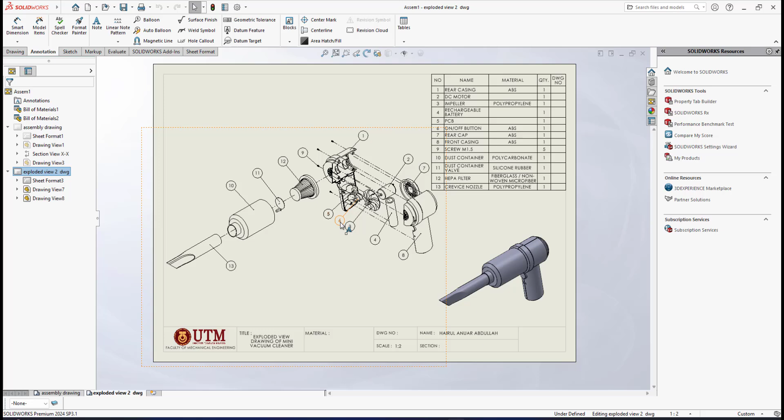In my previous video, I have already shown you how I have done this assembly drawing and also the exploded view drawing. Okay, I just need to tell you that this exploded view, I have changed the orientation of the view of this my mini vacuum cleaner. I already make a different view at this isometric view, and I have rearranged my balloons.

Right, so in this video I would like to show you how I will do the detailed drawing of all the parts involved in making this mini vacuum cleaner. Since you have to produce a set of working drawings, a set of working drawings of a product means you have a set of assembly drawing, where a set of assembly drawing you have assembly drawing plus the exploded view drawing, together with a set of detailed drawing of each part that is involved in making this product, except the standard parts like DC motor, the rechargeable battery, and the PCB, and also the screw M1.5, since those parts are standard components.

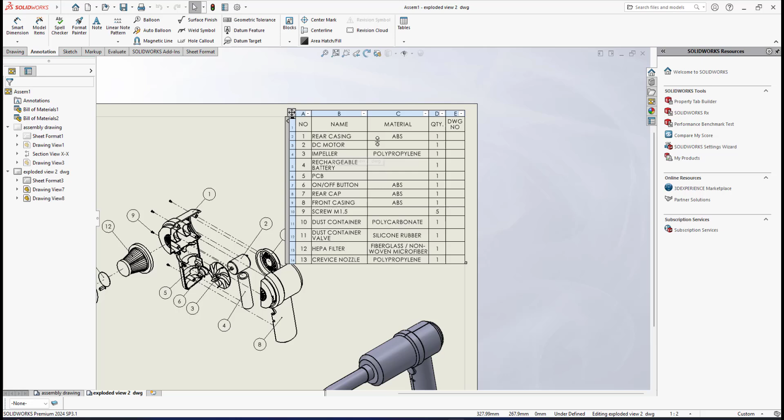Alright, in this video, I cannot show every part for detail drawing, so I will show you the main part first. The main part will be the rear casing and also the front casing. So in this video I would like to show you how I will do detail drawing of this rear casing and also front casing.

Okay, to do the detailed drawing of the rear casing, I will go back to the assembly file. So this is my assembly file. This is an exploded view, my assembly file. So I will click at the rear casing and I go open part. Alright, to do the detailed drawing of this rear casing, I will not make a new drawing from here, since I have already the drawing file from my set of assembly drawing and also exploded view drawing that I've shown you before. So I just leave this part file of this rear casing open. Then I go back to the drawing that I've done for this assembly and exploded view.

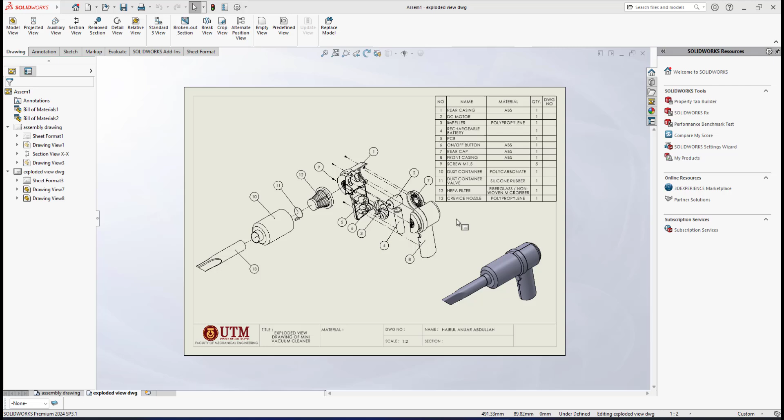Okay, to do the detailed drawing of this rear casing, here at the bottom I will not click at add sheet. This is okay, but I think I have to retype my name and my particulars here, so I will delete it. One way to do it is that I will make a clone version of this assembly drawing sheet here, so I can make a copy and I will paste it. Okay, I just select the sheet and I just click yes, and here the assembly drawing, I will drag it. So the assembly drawing is a clone version, so I can simply delete all the viewports and also the BOM as well.

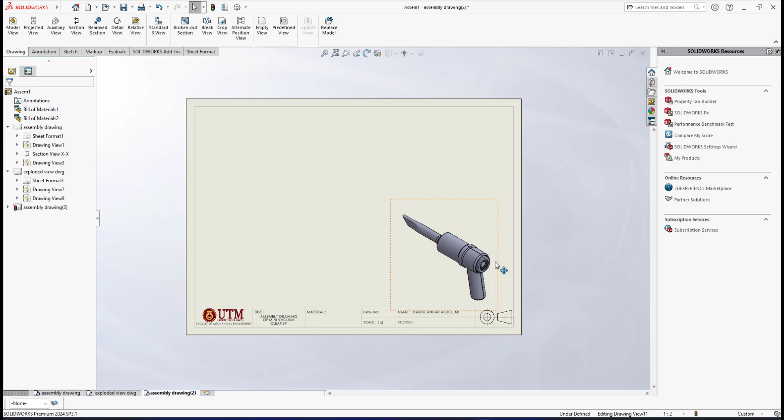Okay, since this is the detailed drawing of the rear casing, I rename it as rear casing. Okay, also the title block, I will edit it, and this one I will name it as rear casing. For the material, if you look at the assembly drawing, the rear casing material is ABS. Right, to put the text here, under annotation we have text, and I put it here.

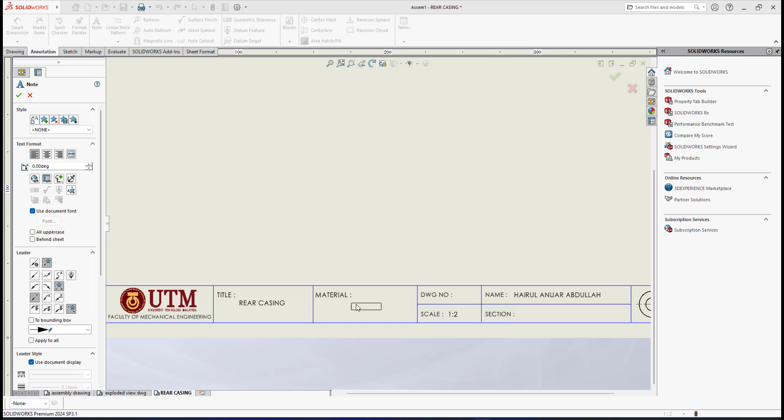Make sure it's in capital letters, ABS. And about the drawing number, if you look at the BOM, the drawing number here, I will type 1 for the assembly drawing in the BOM. So rear casing will be drawing number 1, and here for the rear casing I will double click at this drawing 1. And about the scale, later I will adjust it, either I will use half scale or full scale. Make sure all your particulars are there, and also this rear casing is an orthographic drawing. It could be sectioning, but we must have the third angle projection symbol.

Okay, now I go back to the drawing mode. I save my file again. Okay, now I will show you how I will do the detail drawing of the rear casing. At the right here we have the menu view palette. I click at view palette. Now I have all the views. So the rear casing is listed here since I have already opened the rear casing file.

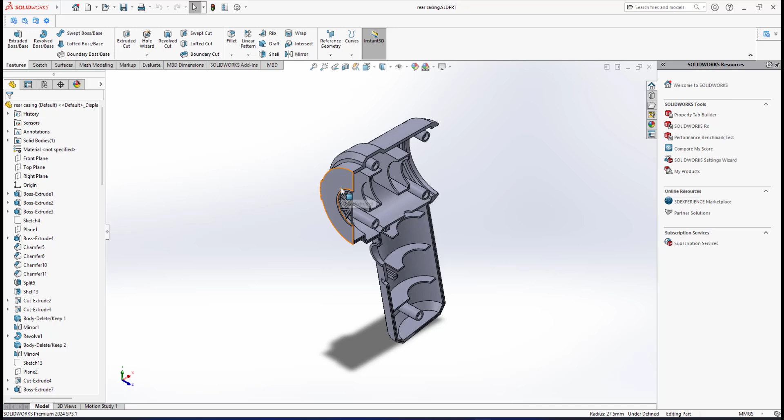If my rear casing file is not open, I close it, and when I go to view palette, if your rear casing is not showing here, you have to click at browse and you search for your rear casing file. So this is my rear casing. That's one way to do it. And now SolidWorks will put in the menu here all the possible views from the rear casing part modeling file that we can drag into this drawing.

Okay, before I proceed putting all the possible views for me to create the detailed drawing of this rear casing, let me show you the first thing about this rear casing of this mini vacuum cleaner. As you can see, this is a part modeling that I've done for the rear casing, and this rear casing is a plastic part made from ABS.

As you can see, it has kind of complex internal and external features. On the internal side we have internal features like ribs, mounting bosses for the fasteners, and also a supporting rib to hold the DC motor, the rib to hold the battery, and also the slot to hold the PCB.

So I think to do the detailed drawing with detailed dimensions, it would be too complex to be shown. It's not necessary to show really detailed and complete dimensions for this kind of plastic part. So I will only include the important dimensions, such as the overall size and the features which are important for assembly and fit in the engineering drawing.

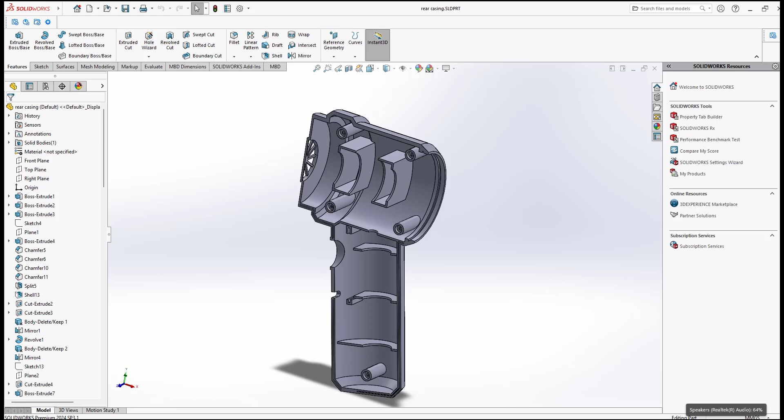So the main goal of this detailed drawing of this rear casing is just to show the design intent and assembly. We don't have to produce really detailed dimensions. Okay, to do the detailed drawing of this rear casing, the first thing I need to decide is which view I should drag to this drawing. For my case, the most important view that I should put into this drawing will be the front view.

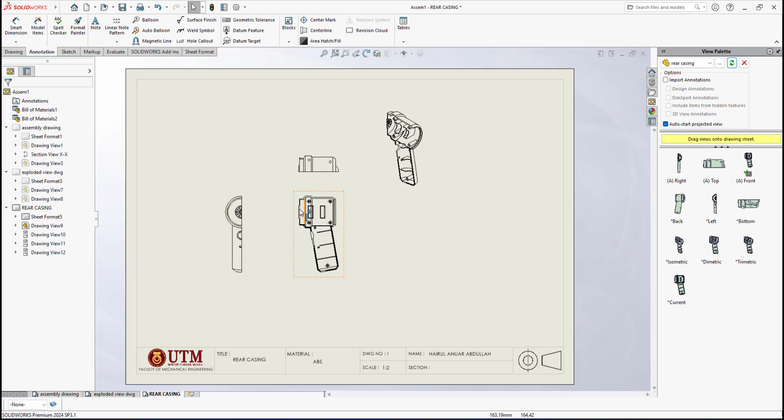So I will select this front view and drag it to this position. If I bring my mouse here, I can go for plan view, and here I can go for left view. If I bring it here, it will go for isometric view. So I press escape, and as you can see, this main view is the front view. If I click at it, I go for 1:1 full scale, and let me drag this. I think full scale is good enough to fit into this A3 size paper.

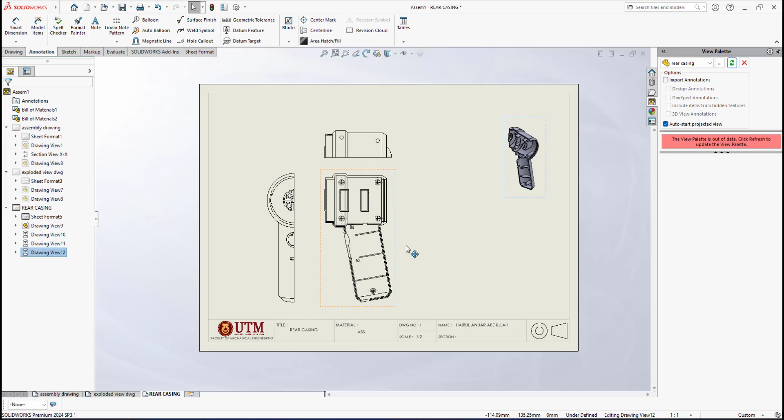And the isometric view, I put it here and make it shaded style, and also right click at it and remove the tangent edges. And for this isometric view, in the settings on the left, make it half scale. Since I already put three views here, later I will decide which view I can delete, either the left view or the plan view, but I need this front view, since it is the main view that shows all the features of this rear casing.

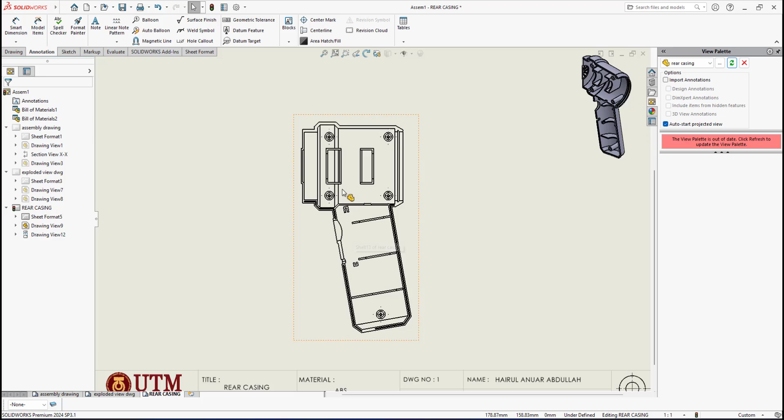Okay, let me delete for a while this left view and also the plan view, since I already mentioned that we don't have to do complete detailed dimensions for this rear casing, and I will show only basic dimensions like the overall size and dimensions for important features of this rear casing.

About this front view, later I will also show you how I do the removed section, not full section, that could show some features of this rear casing. For example, the ribs, the holes here, we have the hole for the power button, and also features of the slot, and also the 3, 4, 5 pins here, and the other important features.

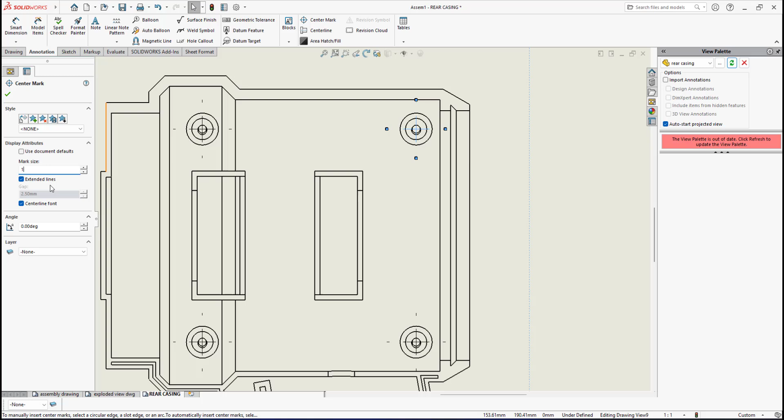Alright, the first thing is to look at these 4 pins here. We have a center mark. If I click at that center mark, it uses the document default, so I uncheck it and make sure I put it at 1. Now we have a better version of the center mark, so here as well. So I will select this center mark, and I select this one also.

Then I uncheck it and make the size 1. Right, let me save my file first. Okay, since this front view is not a section view, it will be a typical orthographic view, so I will make sure it shows hidden lines. And another thing, I've got to make sure that the tangent edge is removed. Okay.

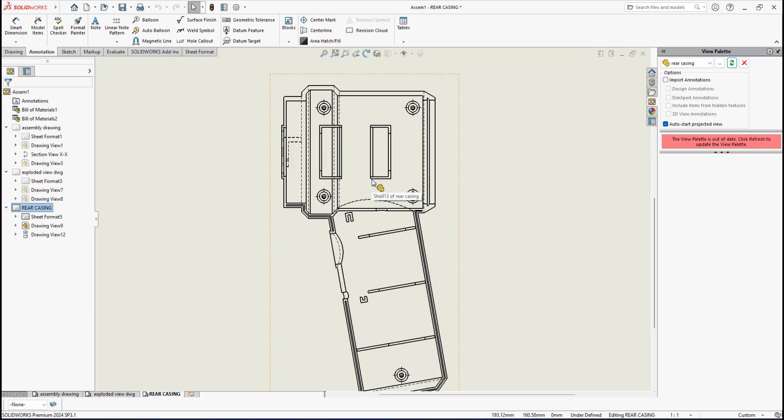Because this is the handle, I need to show a center line, since the handle is kind of like an elliptical shape. It's not a round shape, but I need to show the axis. So I have the center line under annotation, so I will select these 2 lines holding my control key, then I have the center line, so it kind of shows the axis of this handle, right? Then put it like this.

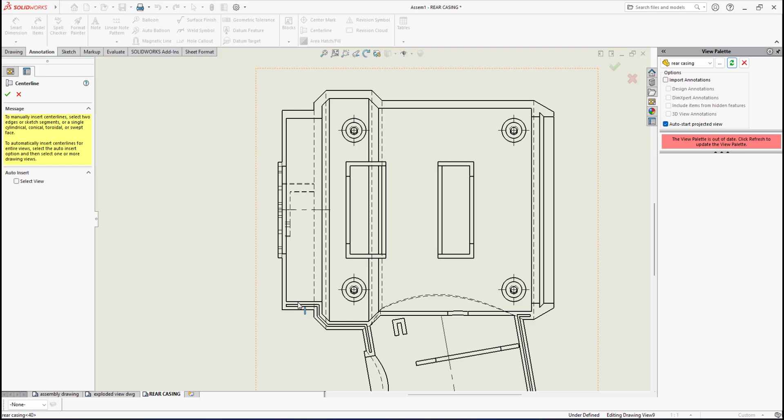And same goes for the upper part here, since it is like a cylindrical shape, I will also do a center line, so I select this one, and hold on, not this one, let me clear everything. I do center line, I select this line and this line, so I have the center line, so I can drag the center line like this, so we have the axis.

Okay, before I do dimensions for this rear casing, I need to mention to you again, this is the rear casing. It is a plastic component made from ABS. The way they will manufacture this rear casing is not by reading your drawings. Since this is a plastic casing, they manufacture it by sending your SolidWorks part modeling file to CAM software like Mastercam.

And this software will translate your SolidWorks part modeling file into a CAM version, and in this software you will do kind of coding, translating it so that this file can be read by a CNC machine. This file will be sent to the CNC machine, computer numerical control machine, and this CNC machine will do the right tooling and make the metal mold for this rear casing.

After the metal mold is done by the CNC machine, it will be put into the injection molding machine. This injection molding machine has a feeder, so the operator will pour the plastic bits, which is ABS material, into a screw feeder, and the screw feeder will compress these plastic bits into liquid ABS plastic, and this liquid ABS plastic will be injected into the metal mold. So they make a mass production of this rear casing.

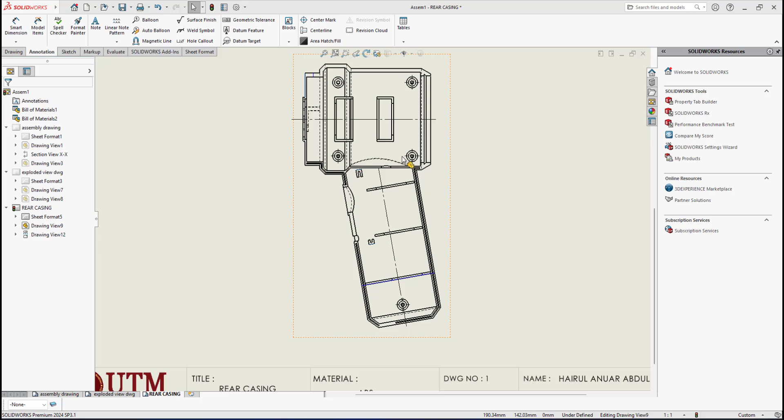So since this is how they will manufacture this rear casing, we don't have to put really detailed dimensions for it. The dimensions are meant for the assembly line, because at the end of the production line the assembly guy will assemble your parts, so we need to provide dimensions as a guide for the assembly guy, so he knows the dimensions in terms of assembly and fitting.

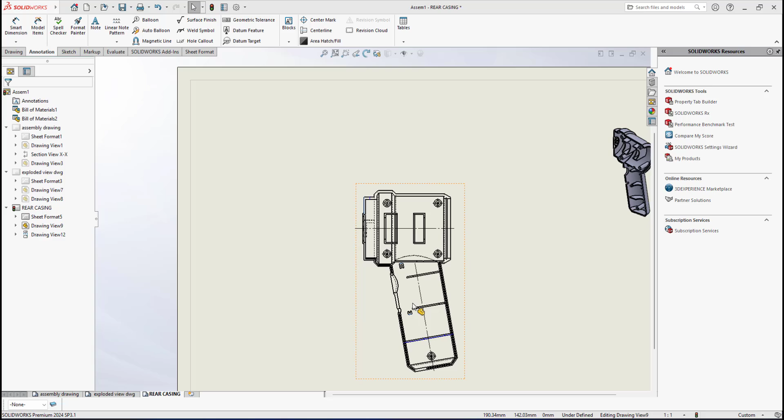For example, we need to give the dimension of the end nozzle of this rear casing. We need to give the diameter, since we need to fit the dust container into this position. The dust container has an inner diameter, so we refer to the outer diameter here on this rear casing. It's for assembly and fitting of parts, so you don't have to give detailed dimensions for this rear casing unless your drawing is meant for the machinist on the manufacturing floor, like most metal parts. Then your drawing has to be really detailed with complete dimensions.

Alright, so the dimensions here will be rough dimensions. It can be the overall size of this rear casing, and also dimensions of features for assembly and fitting, like the diameter of this nozzle to be fitted into the dust container. Then also the position of this pin, because we have bigger pins for this rear casing. We have 5 pins, so we need to give the size of this bigger pin.

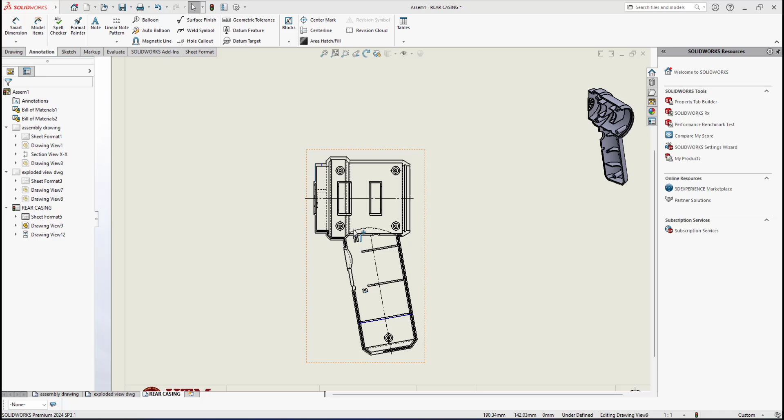Since this pin will be fitted onto the front casing, where we have a smaller pin that will be fitted onto this bigger pin here, we need to give the dimension of this pin and the location. And also inside here we have an inner thread, because of the fitting of the fastener, the screw M1.5. We need to give the dimension for this inner thread, for example M1.5.

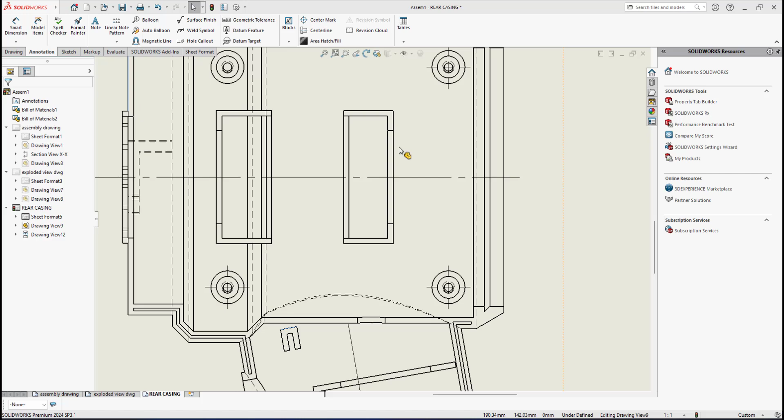And also features like, for example, I don't have to give the thickness of this rib, because that is not significant, like I mentioned just now. The only thing is about fitting, since for this supporting rib the DC motor with impeller needs to be fitted at this location. We need to give dimensions in terms of fitting the DC motor. For example, the DC motor is a cylindrical shape with a certain diameter, so we need to give the diameter of this cutout, only for assembly and fitting.

Also, the battery will be put into this location. Since the battery is cylindrical, we need to give the diameter of this cutout where we will mount the rechargeable battery. Also we have a hole here for the power button to be fitted. We need to give the diameter of this hole.

And here we also have a slot for the PCB with the USB port; we need to give the dimension of this slot, and only the important features. We don't have to make really complete detailed dimensions. So I will show you how I will do dimensions for this rear casing.

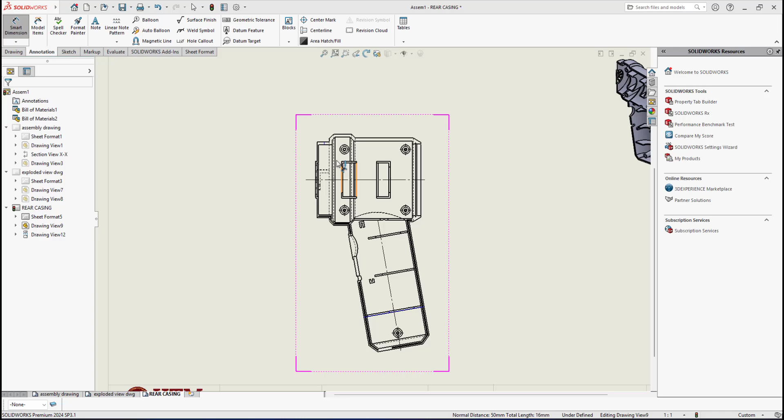Okay, to do dimensions for this rear casing, the first thing is the important features for assembly and fitting. So this diameter at the end nozzle here will be fitted into the inner diameter of the dust container. To do a dimension, under Annotation we have Smart Dimension, so I click Smart Dimension, then I go for this line and this line. As you can see, when you do a dimension there is an icon for whether you want to go to the left or to the right. So I will go to the left, so it will be put at this location.

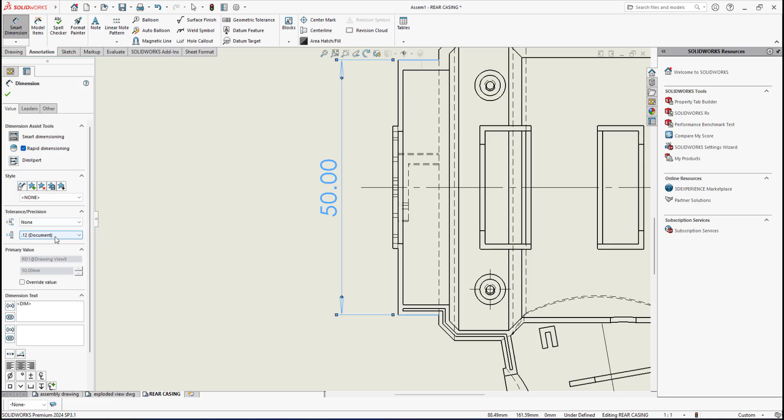And as you can see, the text is 50.00, so in the settings on the left, under tolerance precision I can go for none, no decimal point. If I click OK, the dimension text is okay, the dimension line is okay, but the arrowhead is not filled in, not solid. So this is not standard.

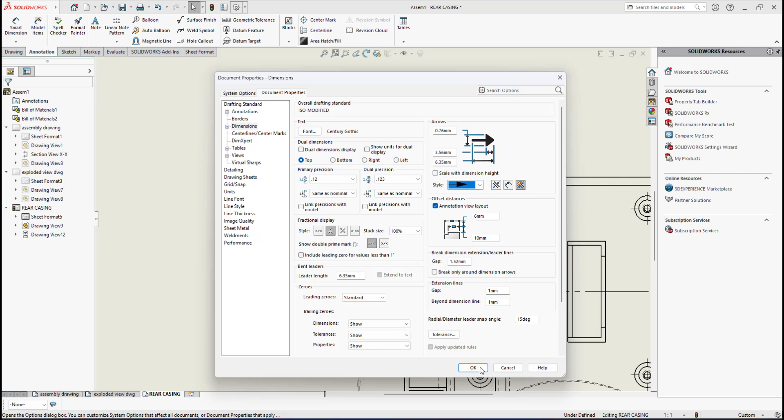In order to fix that, you click Options, and in the menu, I'm not going for the System Options tab, but under Document Properties we have Dimensions. If you look at the style of the arrowhead, I will not go for this one, I will go for the second one. It makes a solid arrowhead. Then I click OK. Now you can see the arrowhead is solid.

Alright, I already put dimension 50, but you must obey standard dimensioning. It's not too far away and not too near, at least for the first label about 2 letter heights, about this position. If sometimes your text is not aligned at the center, in the settings on the left under Dimension Text we have this icon. If I click it, it centers the dimension text. You put your text in the middle.

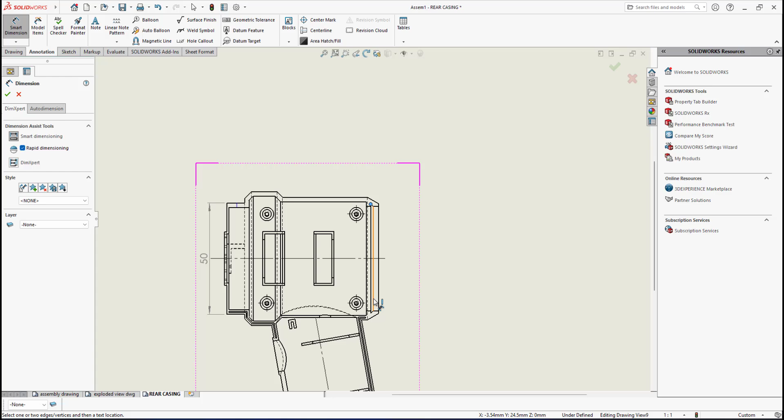Another important dimension, like I mentioned, we have a slot here since we need to fit the rear cap, so we can show the diameter of that slot. Since the rear cap is based on this diameter, I click this one and this one, then I put it at this location. So the diameter is 49, since the rear cap diameter is also 49 and will be fitted here. For the decimal point, under tolerance precision you can go for none, so there is no decimal point, and you need to position it a little bit closer.

Another important dimension, before I go dimensioning the 5 pins here, is the overall size, because the upper part is more like a half cylindrical shape, so I need to give the overall length here. So I click this one, go to the top position, go for no decimal point, and not too far above, about this location. Let me save my file. So I have a basic dimension for the overall length of the cylindrical unit. And another overall dimension is the total length of this handle.

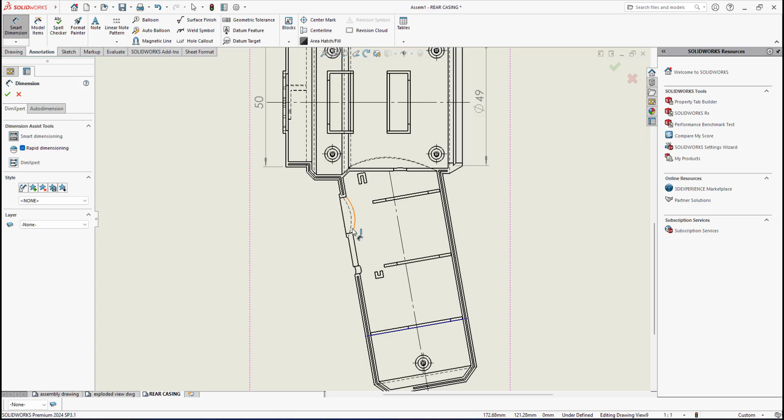At least I can show it. Okay, to do the length of this handle, I can do dimension from this point up until that point. I will go for this line, so it can make a line dimension like this. So I click like that, so 85.27 will be the

length of this handle. But if you look at the setting on the left here, we have centre dimension, so you put your dimension tag in the middle. Right, I have the total length. Okay, another thing is about the width of this handle.

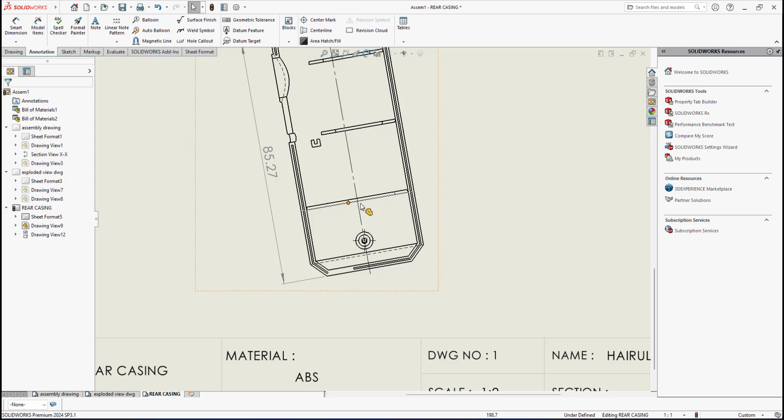Alright, the width of the handle. We have a projection view at the bottom here. One way to give the width of this handle, since the shape is not round, it's more elliptical shape, I can do what we call in drawing a removed section. To do a removed section, I can select this line and also this line. So I have a position where I want to do the removed section.

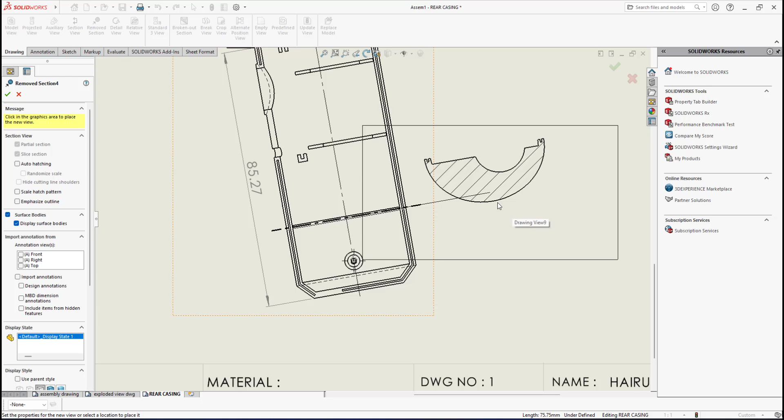I will not do it at this section, I will go straight away to the supporting rib that can hold the batteries. So I make sure it snaps at that middle point, then I simply click OK. Then I bring my mouse to this location. So this is a removed section. By this section view here, I can give the overall cross section of this handle. So under annotation, I can give dimension from this point to this point.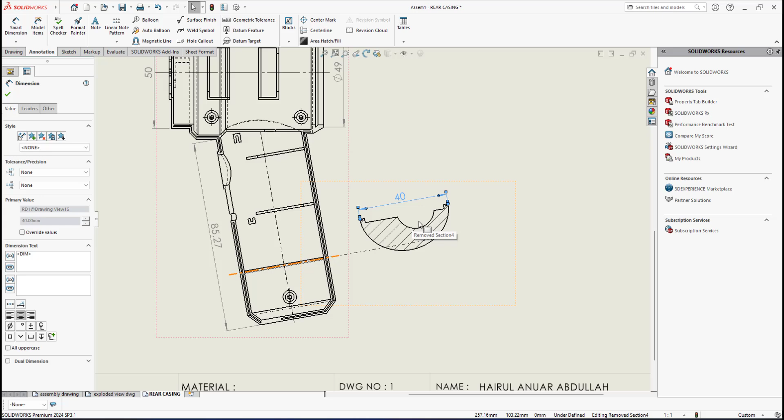Hold on, I must click a dimension first. Dimension from this point to this point. Make sure it's aligned dimension like this, and in the setting on the left, I make it no decimal point, and I click OK first, then I drag it somewhere at this position. So this will be the width of the handle. Since this is an elliptical shape, it's not a full circle.

Okay, if I do the dimension from this point, I don't have a reference point here to give the height of this elliptical shape. So in order to do that, under the sketch here, I can do a point. So I put a point somewhere. It will snap at the middle of this ellipse. So I have a middle point there.

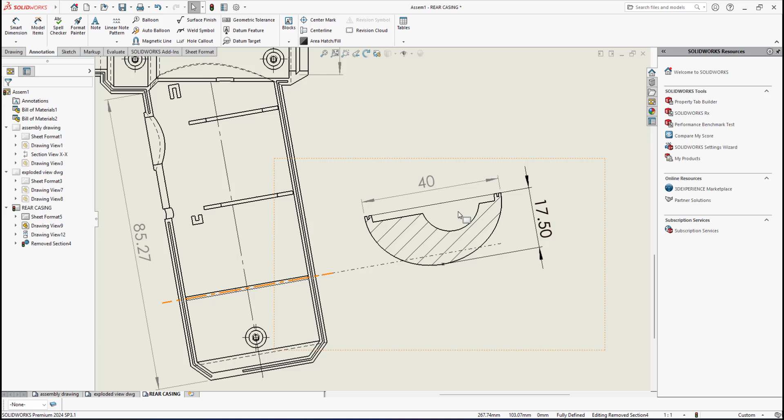So under annotation, I can do smart dimension again. I can start from this line up until this point. I just click OK. Now we have a height of 17.5. So this will be the overall size of the cross-sectional shape of this handle, right? Okay, let me save my file again.

Okay, the next one: since we have features, we need to show what the diameter will be, since we need to mount the rechargeable batteries, and rechargeable batteries have a diameter. So I need to give this dimension here to show radius or diameter. So this is meant for the assembly and fitting.

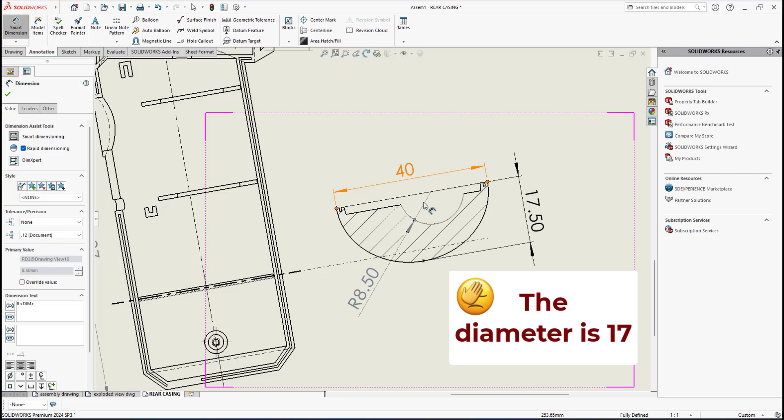It means that the radius is 8.5. It means the diameter is 17, since the diameter of the rechargeable battery is 17. Okay, I have that feature. And another thing is, we have 3 more supporting ribs. I don't have to put detailed dimensions. The dimensions I want to show are only meant for assembly and fitting. So once I already put it here, it's enough to show.

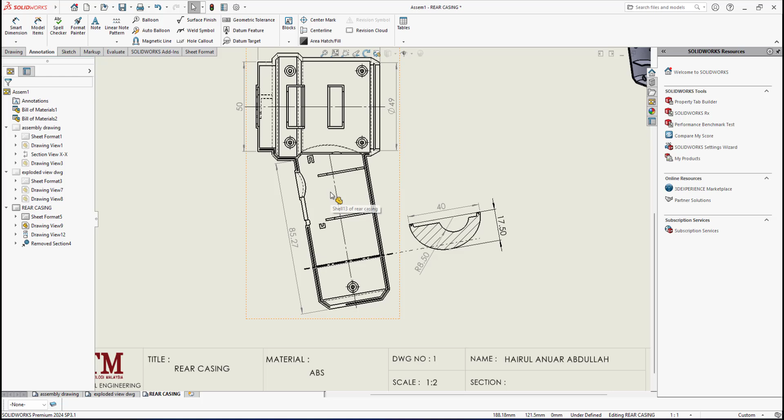So we have a supporting rib here, and the diameter is 16, and it's meant for putting the rechargeable battery at this supporting rib. Right, like I mentioned, maybe I can go for the overall diameter. Since here is meant for the cutting slot, we have a cutout for the rack cap, but at least I can give the diameter for this cylindrical unit from here to this one.

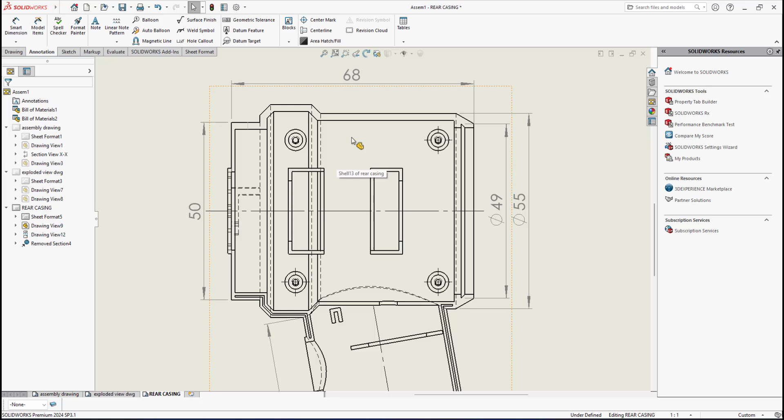So I go to the right, so it gives diameter 55. This one I make no decimal point. Okay, so I have that diameter. I already gave the overall length. And okay, another thing is about these 4 pins. I need to give the location of these 4 pins.

Okay, another thing about this pin, I forgot to put the center mark. So under annotation, we have center mark. I will select this circle. So I have that center mark.

This one I don't want to use document default size. I will go for 1, so I have a kind of standard size for the center mark. Now I will give dimension, the position from this center mark to this center mark. So I just click at the upper icon.

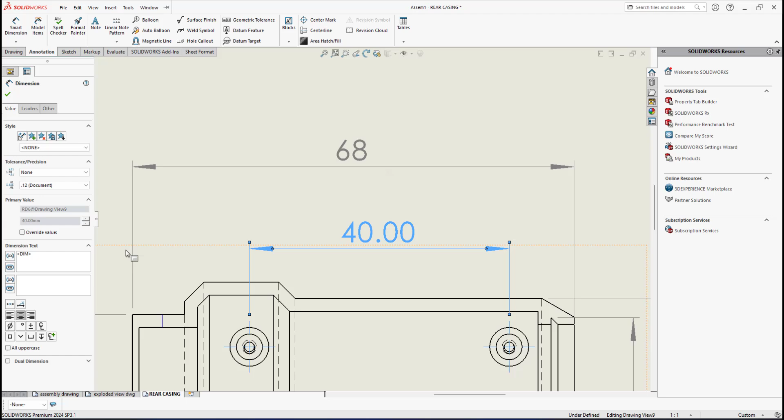As you can see, automatically the diameter 68 will be shifted upward. I need to drag it, so this 40 needs to be a little bit closer like this, and no decimal point, and the diameter 68 needs to be a little bit like this. Alright, so I have the dimension, the distance between these 2 pins, and also the vertical dimension, the distance between these center marks and these center marks.

So I just bring the icon to the right, so everything is shifted, and no decimal point, but I need to readjust, so the dimension is not too far away to the right of this location. I need to adjust this, make it a little bit closer. Okay, then I click OK. Then I save my file again.

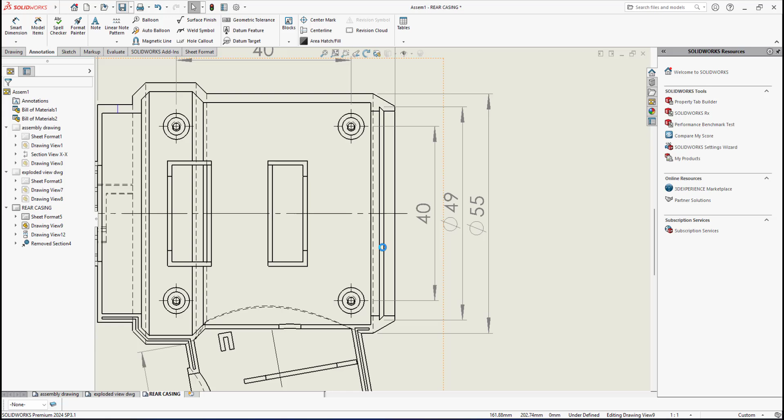Right, I already gave the horizontal dimension and vertical dimension of the pins. So where is the position from this center point of this pin to the end here? I need to give the location from here to here. The dimension is 18. You have to make it align like this, and no decimal point. So now I have 18.

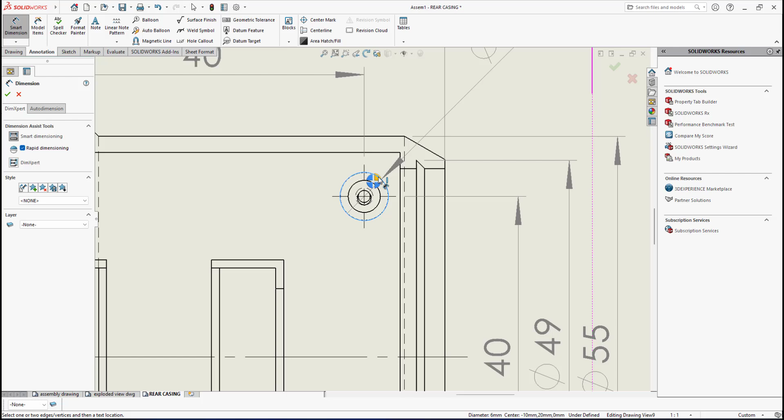Okay, since I already put the location of the 4 pins here, I need to give the diameter of that pin. So I can give here the diameter. Sometimes it's allowed to put your dimension inside, but in terms of clarity, maybe I can put it like this. 6, so you have diameter 6, no decimal point. So this will be the size of the pin.

And also I need to give the inner diameter, since the pin of the front casing will be fitted into this inner diameter. So at least I must show the inner diameter. It's okay to put it inside the object, but not too much, for clarity of the drawing. So I have diameter 4 like that. Maybe I can drag it to this position.

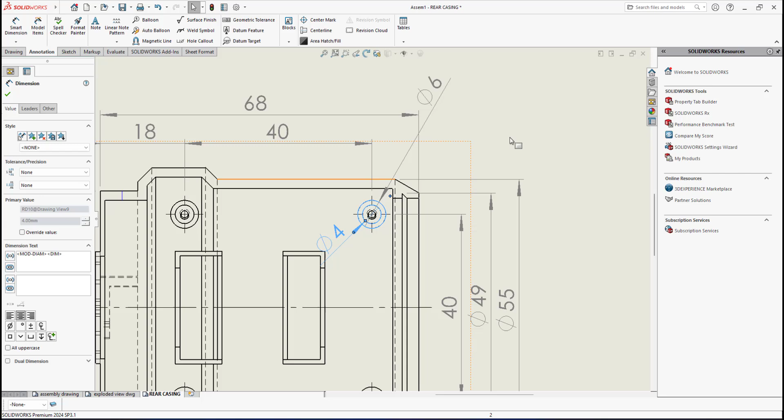Alright, the next thing is the supporting ribs to hold the motor. I don't have to put detailed dimensions, but at least I can show the cutout of the supporting rib. We have a half circle there where we will mount the DC motor. Since this view is not showing the shape, as you can see here, the cutout is part of a circle. So I can do a removed section.

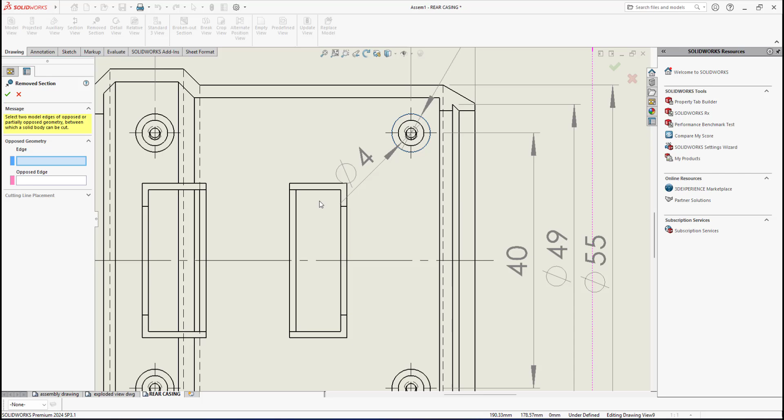Under Drawing we have Removed Section. I do removed section, I can select this line and this line. So we have the level where we will put the removed section. I go for the middle point, then I simply click OK. Then I bring my removed section to this position, and now I have a cross-sectional view of the supporting rib.

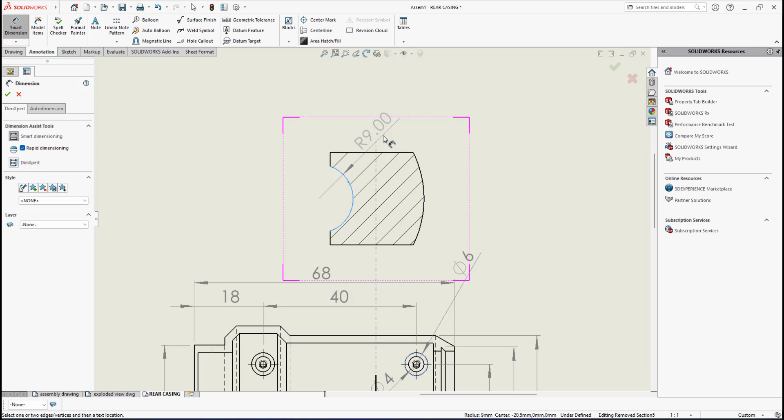Right, I don't have to give detail of the length or the width. The only thing I need is this diameter, for assembly and fitting, because we need to mount the motor at the supporting rib. Since the motor diameter is 18, we have a radius 9. I can go like this to put the dimension radius 9 for this circular cutout. Under value, I go for no decimal point, and put it at this location.

Alright, so this is a removed section. For the other side, I don't have to do the removed section again. The only thing I need to show is the length from here to here. To do that I use smart dimension, then I select this line, from this line to this location.

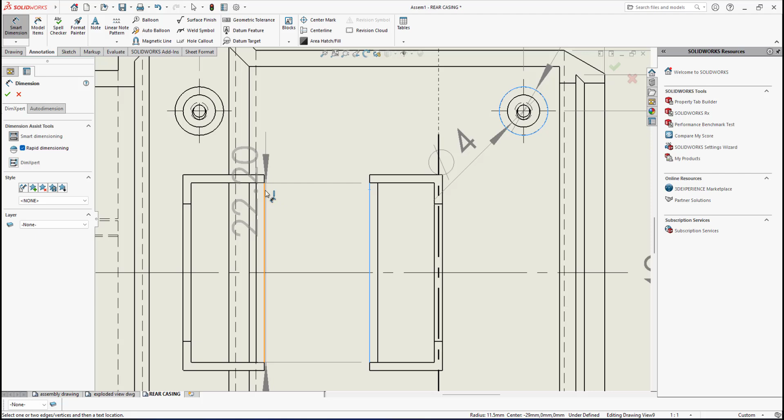Sometimes it's allowed for you to put dimension inside, in terms of clarity of the drawing, but not too much. So I put no decimal point for this, so at least we know the distance from this supporting rib to this location.

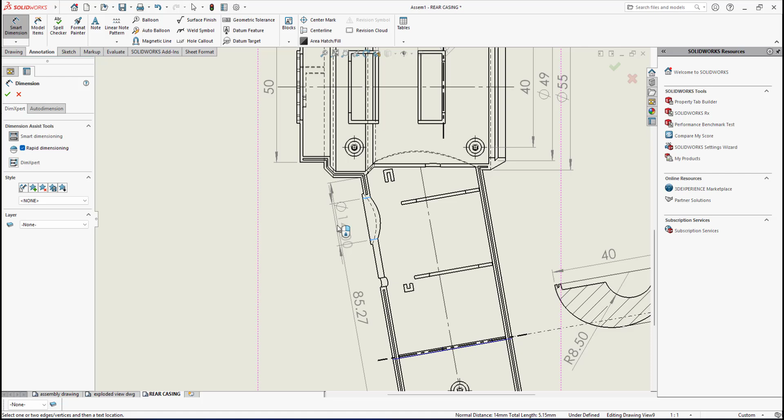Okay, here we have a cut-through hole where we will mount the power button. I can do dimension from here to here. So I will put dimension 14 at this location, and no decimal point. And this total length, I can shift it to this location.

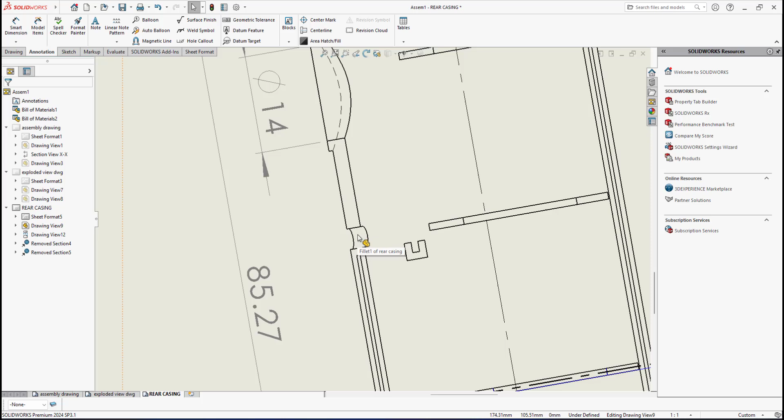Okay, now I have given the dimension of this hole. Another thing is, we have a slot here where a PCB will be mounted into the slot, and the PCB has a USB port, and I need to give a dimension for this slot here. To dimension this slot, I will do the auxiliary view of this slot.

To do this view, under Drawing we have Section. What I will do here is a section view. I'm not doing vertical or this one. I will go for this one, auxiliary section line. So I will select from this middle point to this middle point. Then I click OK. Then I simply click OK.

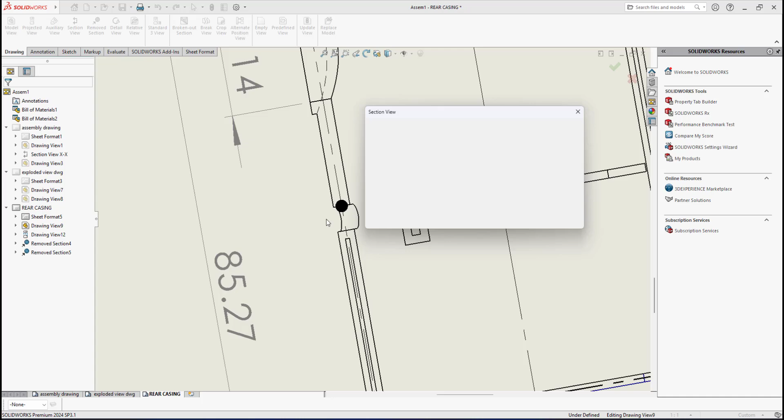It's kind of like we're looking from this view, we have this cross-sectional view, but the cutting section is kind of like a full section. Let me click OK first. If I select this cutting line, I click edit cutting line, then edit sketch, and then I select the line. I'm not adding more lines, I just press escape and select the line here.

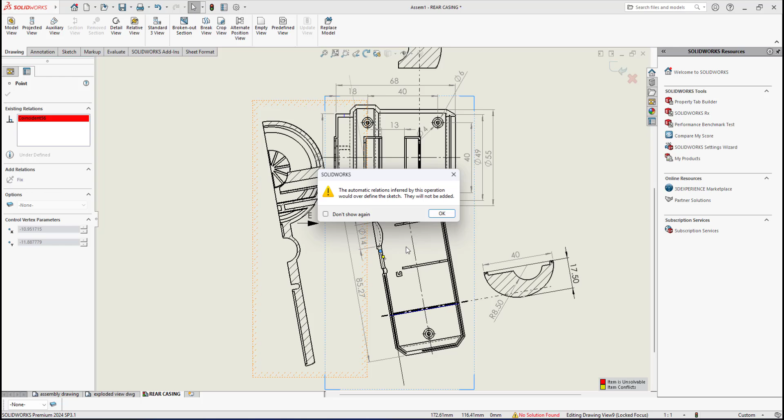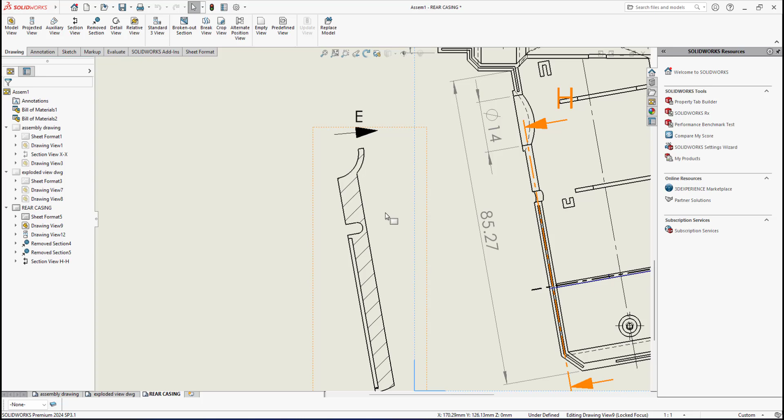I make it shorter up until this position, and click OK. And this section here, I make it up until here, and this one I make longer up until this position. If I click OK and exit, we have a kind of removed section. This arrow shows looking from this direction, so I can see the normal, perpendicular view to dimension this slot for the USB port to be fitted into.

So I can do smart dimension from this point to this one. This will be 4.5. I can also give a dimension from this point to this point. I make a linear dimension like this, and this one is 3, with no decimal point. Then I click OK. Now I have the dimension.

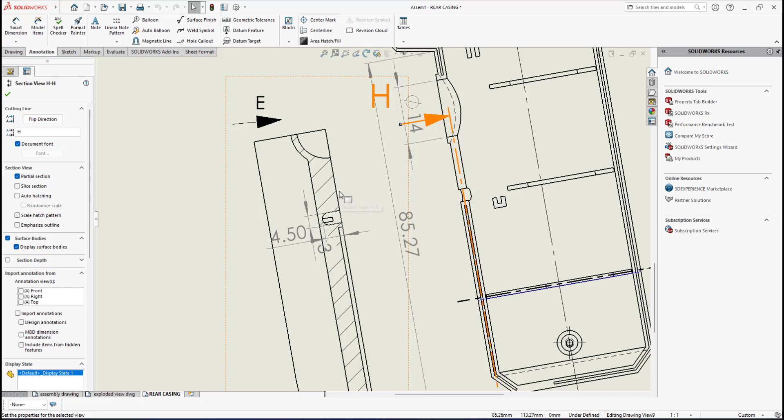Another thing I found here: since the viewing direction is this way, I need to click flip direction on this cutting line, so it goes to this viewing direction. Now my section view goes to this orientation, so I need to adjust. I already put the dimension of the length here. So this will be the width and length of the slot, meant for the PCB with the USB port fitted into the slot.

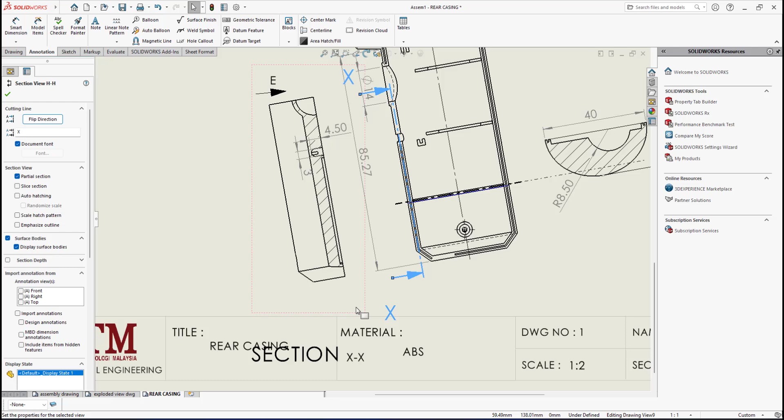Okay, the label here I can change. Instead of H, I can go for capital letter X. I click OK, and now I have this section view. And since we have section X, a kind of removed section, I can bring the title here. I don't want it to overlap with the title block.

And this title, I need to change it. Make sure it's in capital letters, and make sure the text height is 4. Okay, now I've done this, showing the size for this slot.

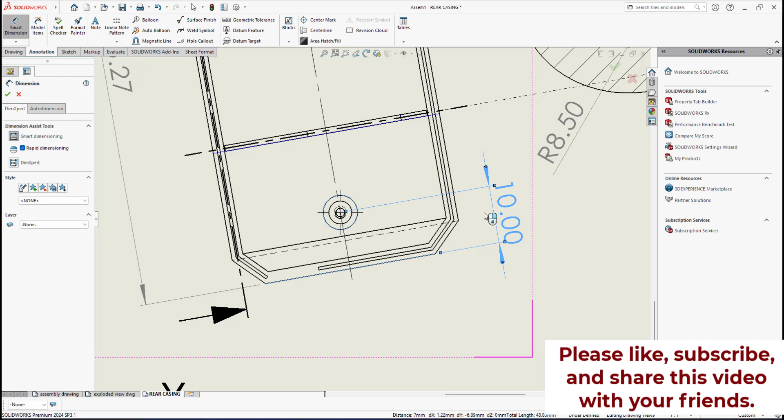The next one will be the location of this pin. I will do smart dimension, and I will not select the center mark. Just simply select the circle and this edge, and the dimension is 10.

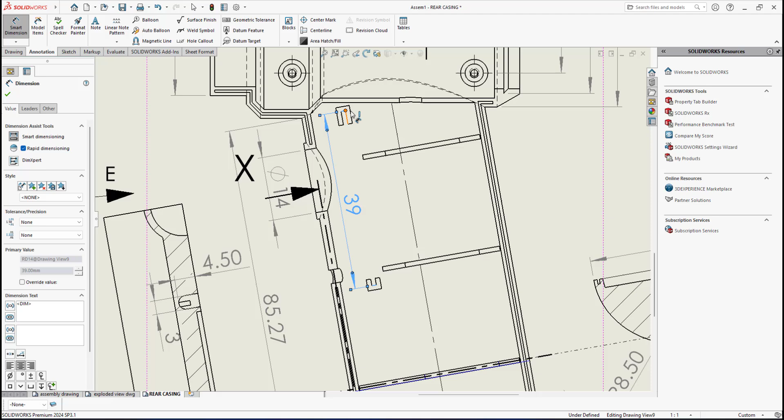The last thing to show is this one. Since we will mount the PCB into the slot, we must show the length of the slot, not the outer length but the inner edge from here to here, since this length will be the length of the PCB. I don't have enough space here; as I mentioned before, it's allowed to put dimensions inside the object, but not too much, for clarity of the drawing. Now I have length 39, which is the length of the PCB.

Another thing about the PCB is thickness. I must give the thickness from here to here, so I must give this dimension as well, since this will be the size of the PCB.

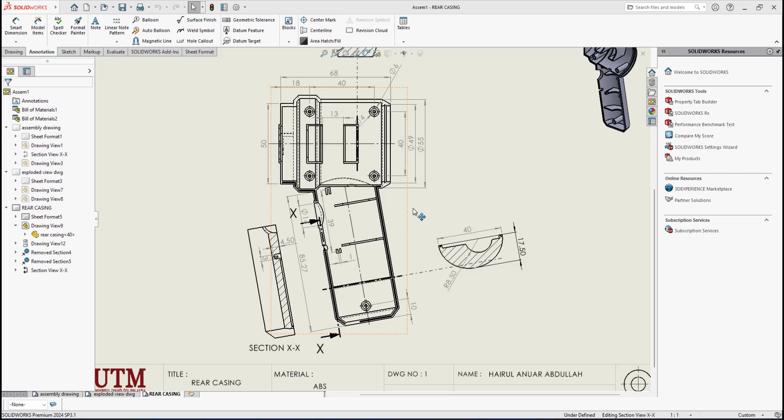Alright, let me check again. Okay, one thing about this X, so this is a letter X. I can adjust the letter X at this position. Okay, I need to position this front view here to make it to the center of this drawing. Okay, at least all these views are at the correct position.

Alright, the next thing is about the dimension of this internal thread. I need to show it, since this is an important feature to be shown, since we need to mount the M1.5 screws into this internal thread at the back there. So I need to put a dimension.

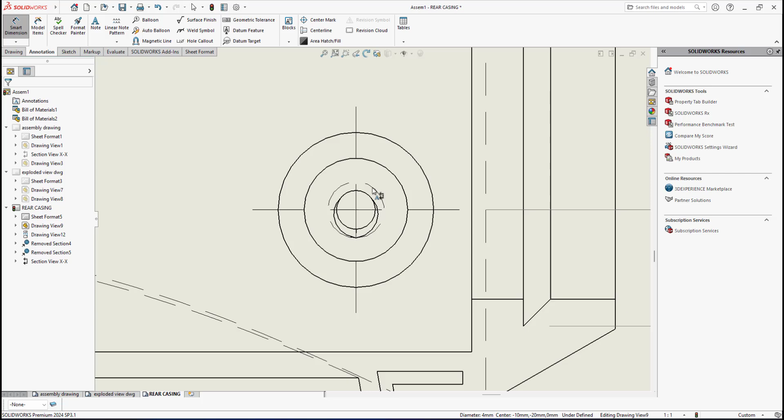If I go for annotation, smart dimension, I cannot point to the internal thread features; it cannot point to the circle or the curve. If I select this one, I cannot make a radial dimension. But if I select this curve, this is not the internal thread, this is the inner diameter of this pin, so I cannot do that.

Alright, in order to give an internal thread dimension, under annotation here, we have an option called hole callout. I click at hole callout, it will detect this circle here, so I can put the dimension here, but I will not go for radius 0.75. So under the dimension text, I go for metric thread. Make sure capital letter M. Make sure it is M1.5. 1.5 is the major diameter.

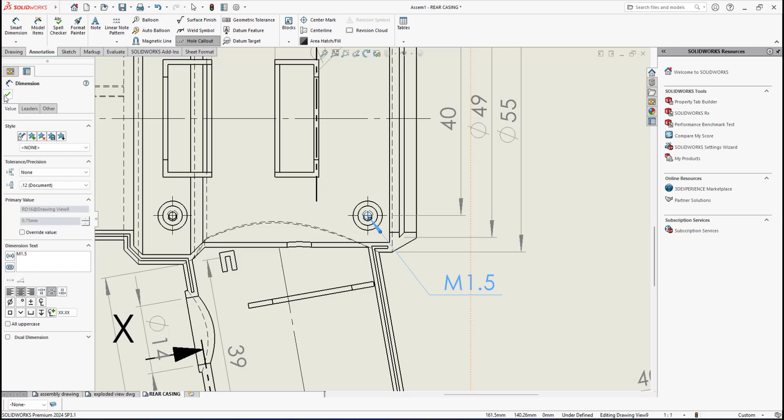Okay, so this can show that this thing is a metric thread. The major diameter is 1.5, so it means that the screw M1.5 will be fitted onto this internal thread. Alright. Okay, one more thing before I forget, about the dimension of this.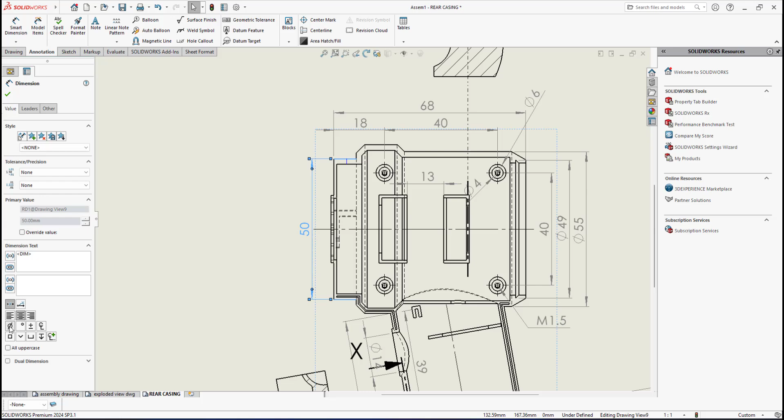At the end here, since the upper part of this rear casing is a cylindrical shape, I need to put a diameter symbol before this dimension text 50. So here at the dimension text, I will click at the diameter symbol, so it shows that this is a cylindrical shape.

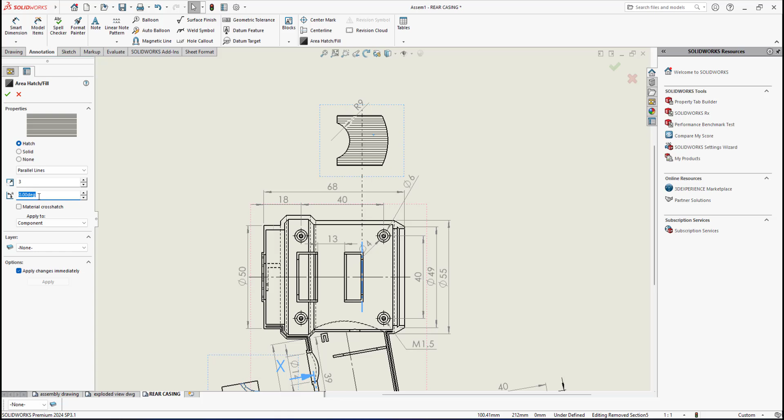Alright, another thing is about the section lines, the hatching. It's using the material cross hatch, so I will use parallel lines, and I will go for 3, and the angle is 45 degrees, and same goes here. So I need to select this one and also this one. I'm not using material cross hatch, so I will use parallel lines, density is 3 and 45 degrees. Okay, let me save my file again.

Okay, another thing: if you look at this title block, the scale is 1:1. I already changed the scale to 1:1 since when I drag this front view, the scale is 1:1, so be aware of this scale.

Okay, hold on, something is not updating here about this one. I have to click this. Sometimes it happens like this. This one is already supposed to be parallel lines.

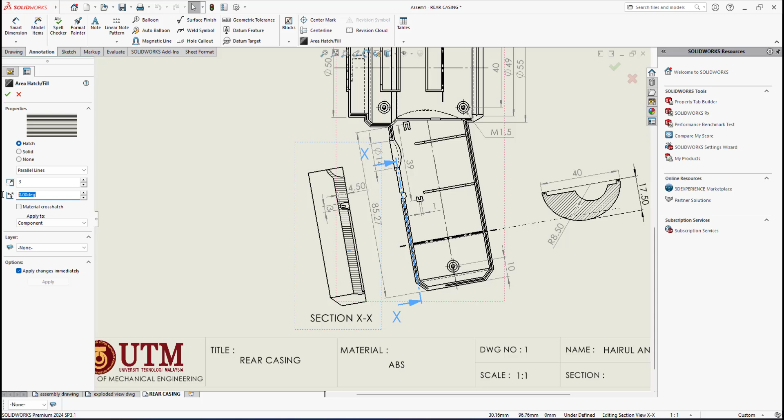Okay, one final thing that I forgot to put is this. At the back here of the cylindrical unit of this rear casing, we have an L key shape, where this L key will be fitted into the L slot of the dust container, since the dust container will be mounted at this position, and this L key will snap fit lock to the L slot of that dust container. So it's very important to show the features and the dimension of this L key.

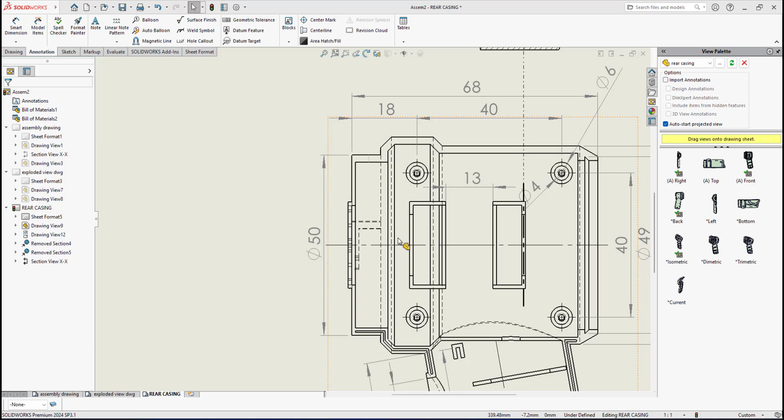Alright, to do this, I will go here, the view palette. At the view palette, here we have a back view. So I will drag this back view. As you can see, it kind of automatically aligns with the front casing. So I will go to this position, and let me click OK first. And now I have the back view.

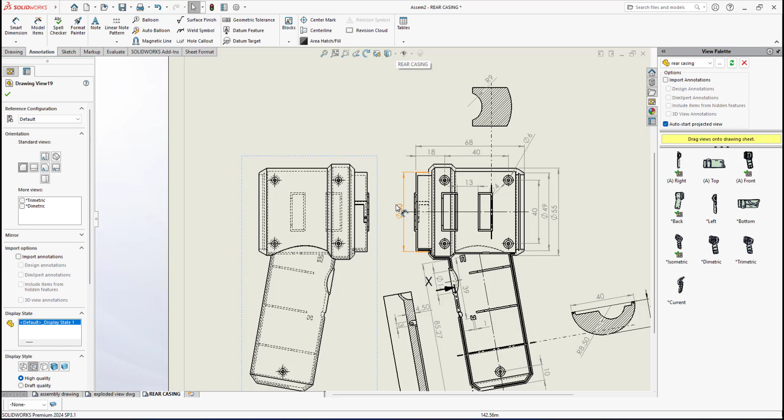Alright, about this back view, since this is not a section view, I select this viewport, make sure to remove the tangent edges, and also go for show hidden lines. Okay, since at the front casing I have given really detailed dimensions, at the back I don't need to repeat the dimensions.

The only thing that I need is this L key shape. Let's say that I don't want to show the whole view. It's okay to do this in engineering drawing, since what I need to show for this back view is only the L key shape. I can do it like this.

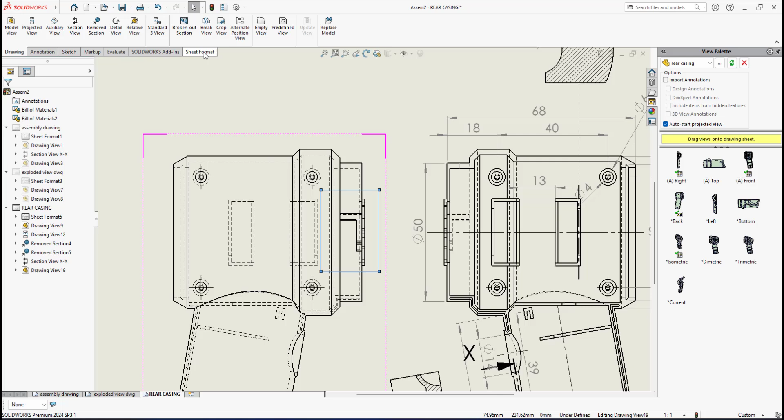If I go for a sketch and I do a rectangle, what I need is only this zone, where we focus only on the L key. I will create a rectangle here. Then under drawing we have another tool called crop view. With crop view, it will automatically crop only to the area that we want, based on the sketch that I've done, the rectangle. Right, okay, here I can put extra notes.

Sometimes people who read the drawing couldn't understand what this is. At least we could put some notes here under annotation. We put some notes; make sure everything is in capital letters. Say that this is back view, and key features. We can type this is back view, and this is the key feature at the end of this nozzle of the rear casing.

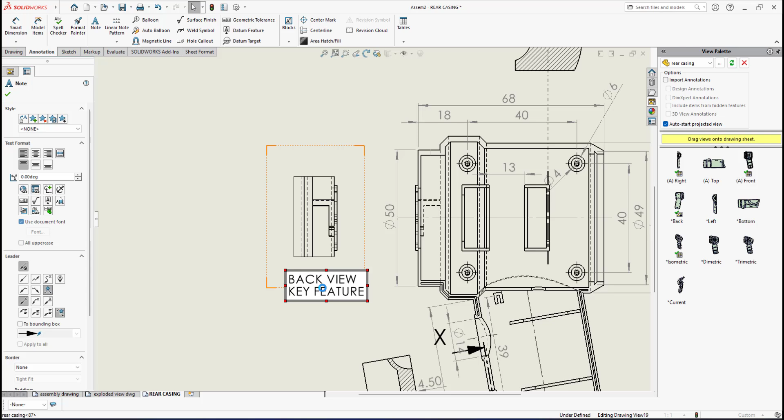Okay, make sure that for the text, when you double click it, since this is a footnote for this view, I put the height at about 4 millimeters. Another thing is the alignment of this text is center, like this. Right, so I drag it here, and now it already states back view key feature. And okay, we must have an S here, key features.

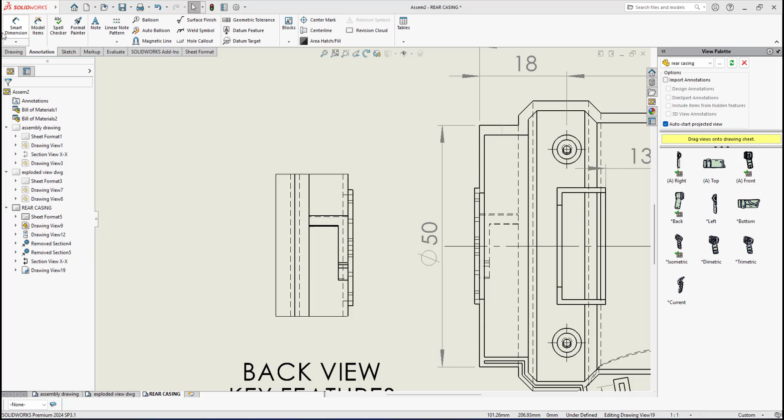Alright, then here I can do detail dimensions. I can go for the thickness of the L key. I do smart dimension from here to this line. It states 2.03. Actually the value is 2, not 2.03, since the way I made this key in my earlier video, I used the wrap command, so the true value is 2. Here I can replace the dimension text and type it as 2, because 2 is the value of the thickness of this L key.

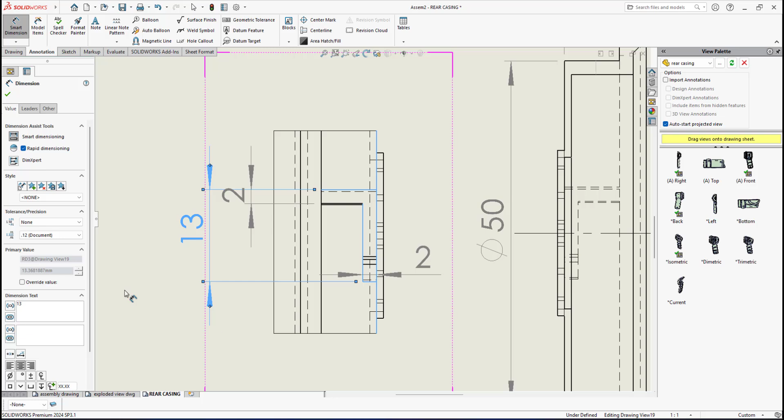Another thing, this one is 2, and I can go for the length. Okay, the length is 13.37. As I have mentioned, the true value is 13, since the way I made this key is by using the wrap command. The 13 and 2 will be the size of this key feature at the end of this rear casing. Alright, I save my file again.

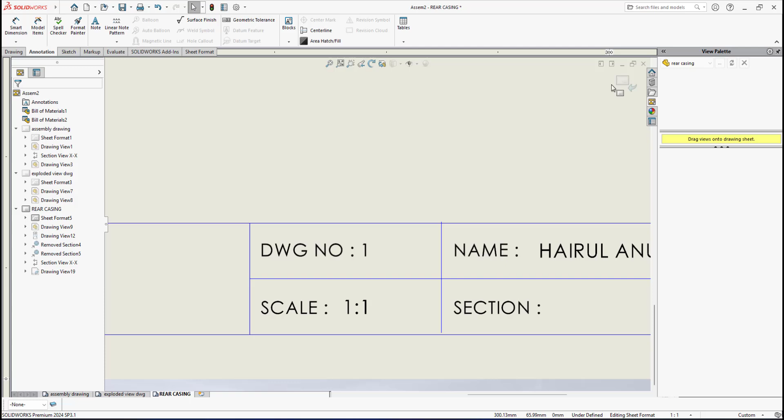Okay, one final thing is the scale of this drawing. Since from the beginning when I dragged this rear casing, the scale of everything is 1:1. So here I need to edit this title block. The scale must be 1:1. Okay, I believe that's all for the detailed drawing of this rear casing. Alhamdulillah, I have completed the detailed drawing of this rear casing.

I will do the detailed drawing for the front casing, but I will not show you in this video, because I believe by watching how I have done the detailed drawing of this rear casing, complete with the important dimensions only, you can learn something from it and implement it for the front casing, since the front casing is similar to the rear casing. The only thing is that the front casing is a mirrored representation.

Okay, about the other parts as shown here, inshallah in the next video I will do the detailed drawing of all the other non-standard parts, like the impeller. We have the rear cap, the dust container valve, and the crevice nozzle.

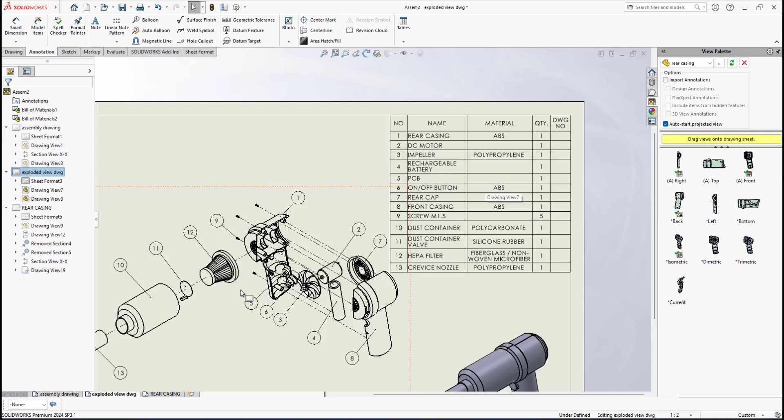Okay, about the HEPA filter, I found out that this HEPA filter may be a standard component. Because sometimes in the design and manufacturing industry, for products like this mini vacuum cleaner, not all the parts are made in-house. For this HEPA filter, they have vendors who do it for them. The vendor designs and manufactures the HEPA filter, not the company who designs and manufactures this mini vacuum cleaner.

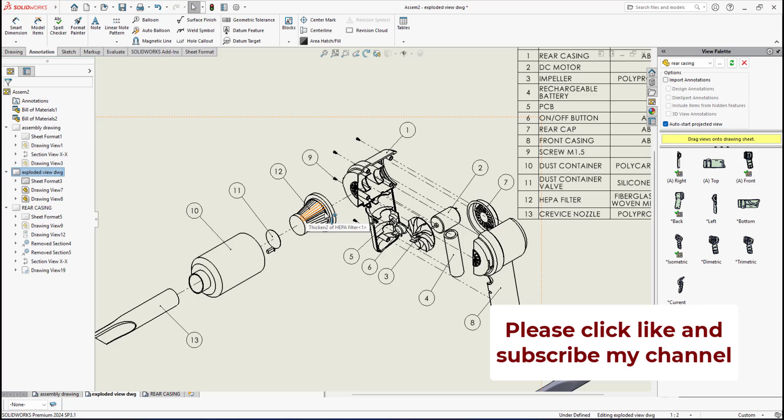So this company will simply order the HEPA filter from the vendors. If this is the case, this HEPA filter will be a standard part. And if it is a standard part, we will not do the detailed drawing for this HEPA filter.